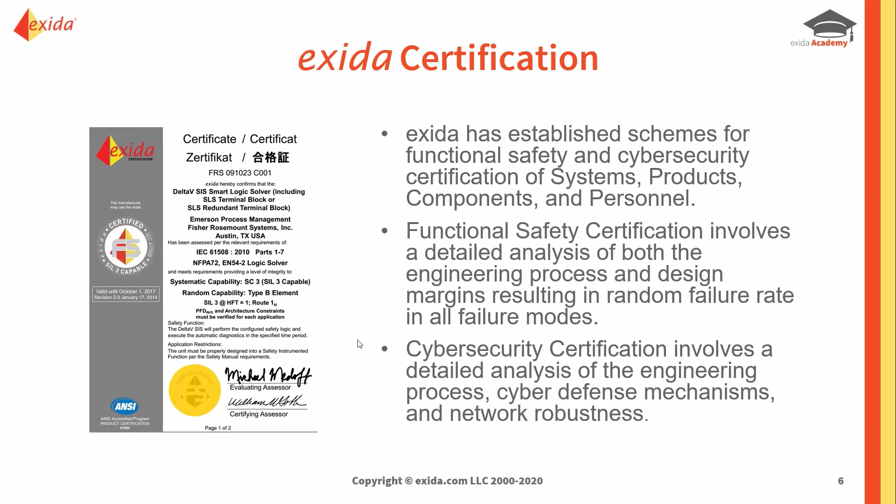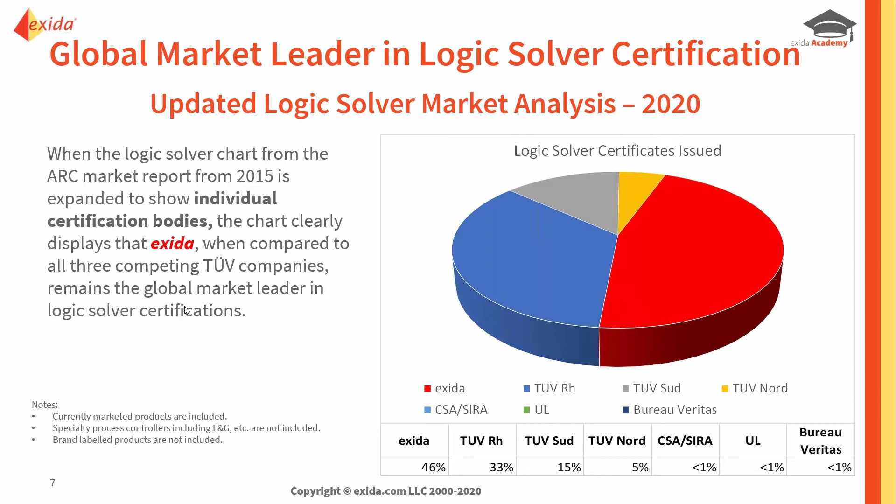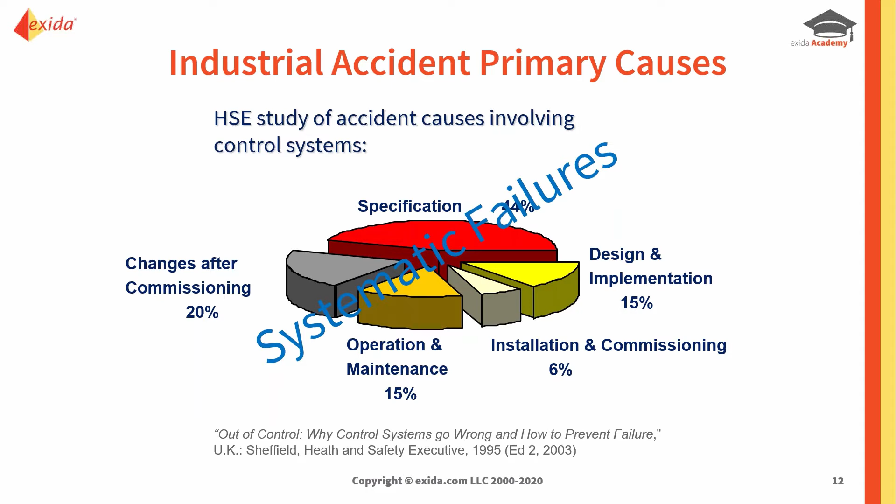When it comes to 1511, 1511 is built around a life cycle. And again, companies that come under the OSHA PSM requirement in the US, in other words, if you have 10,000 pounds or more of anything that's highly toxic, corrosive, it's an asphyxiant or it's explosive, then you have to follow the OSHA requirements for PSM. In the UK, it's COMAH.

And 1511 and the old ISA 84, which is now ISA 61511, is recognized as being what we call RAGAGEP. So both COMAH and OSHA require companies that come under their auspices that they follow RAGAGEP, recognized and generally accepted good engineering practice. Some people say best practice, but RAGAGEP is what we usually mean.

So 1511 is built around a safety life cycle that has the 3 phases I mentioned already. We have an analysis phase, design and implementation, and operation and maintenance. And the whole point of the safety life cycle is to help us balance the risk against the reward, and that is making sure that we have a design that's been built upon sound principles. So we've done our risk assessment, we know what our tolerable risk is, and we're designed to meet that and to achieve optimal performance and cost.

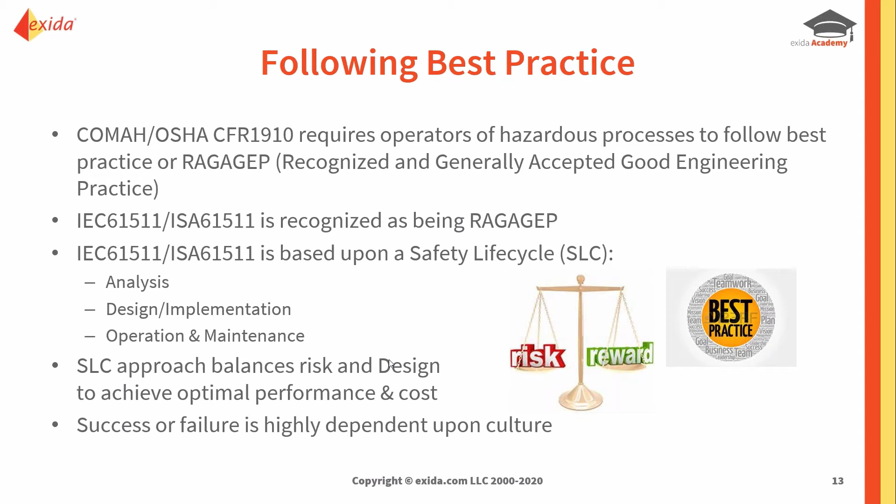Now, one of the other things that is also a potential issue is the overall corporate culture. And corporate culture can play its role in the systematic, because if it's squeezing operations so that they have to cut costs, they have to cut manpower, they can't spend the amount of time they need to be able to do maintenance properly. If all of this has been driven by a bottom line focus, then it's going to be very difficult to implement this successfully or even implement it to meet the risk requirements.

So the objective, of course, is to try and eliminate as far as possible any systematic faults, being those 3 Ps. And then, of course, we want to be able to design to make sure that we have reduced the potential for random faults. So we have a very dependable design.

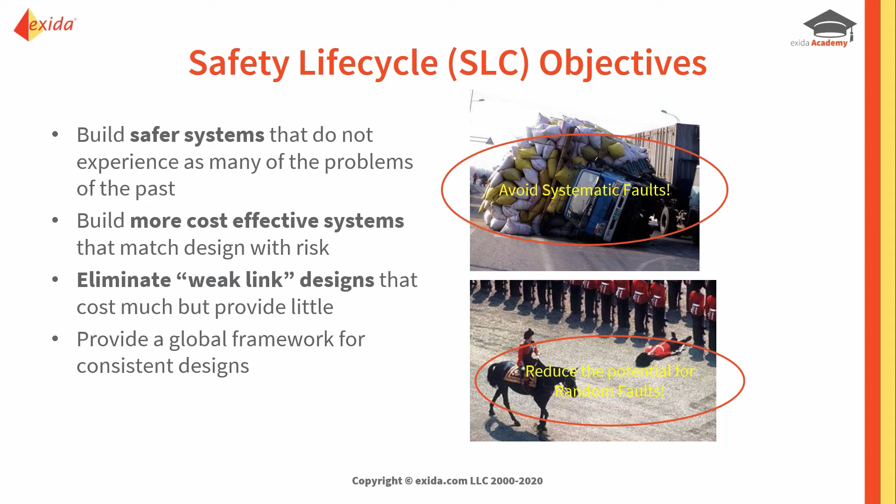And when we look at the life cycle, what happens is when we finish the end of the analysis phase, we've identified the hazards, we've identified the consequences and the likelihoods. We've done our layer of protection analysis, so we know how much risk reduction we need to achieve beyond what we already had. So that would then determine whether we have any safety instrumented functions and what the SIL targets are for those safety instrumented functions. And we capture all of that in what we call an initial SRS, a safety requirement specification, sometimes called the process SRS. And that's what we use to feed into the design phase.

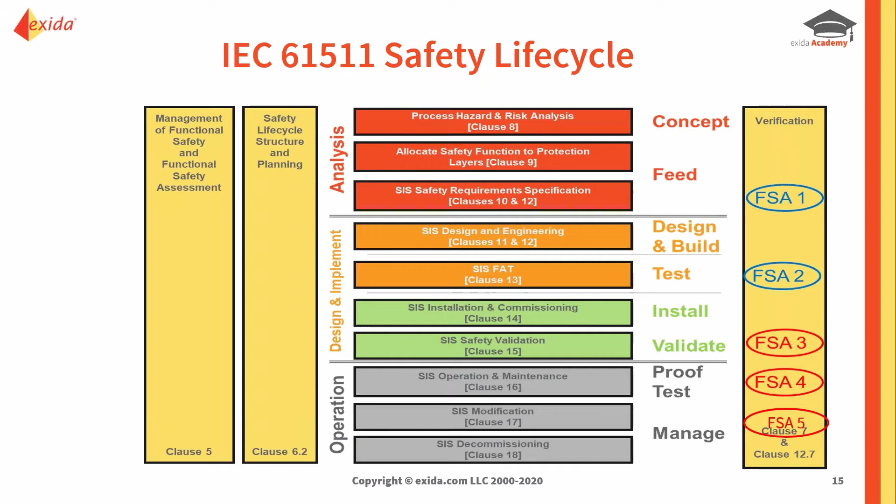So when we look at the design phase, one of the first things we have to do is think about the technology we're going to select for our safety instrumented functions. And of course, what we have to do, according to the requirements of 1511, is justify that selection. And the justification is very important because we need to make sure that the systematic capability for the SIL, as well as the application and reliability requirements, are met.

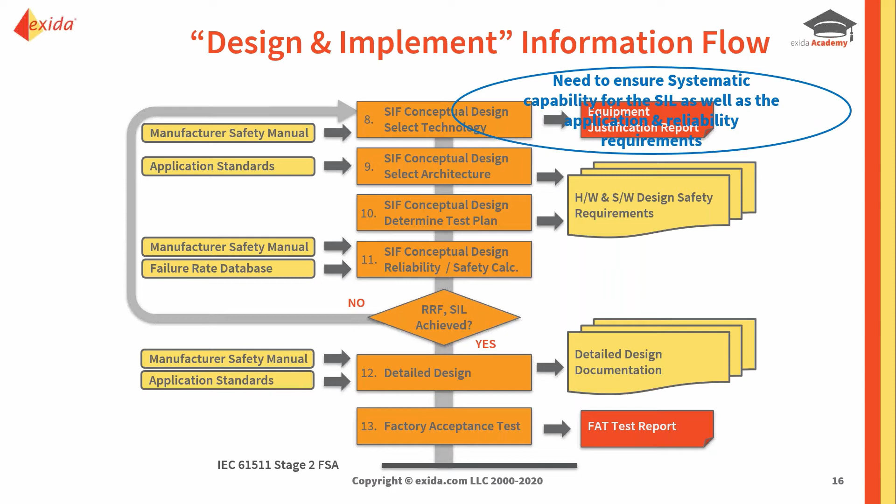So we should be selecting the equipment that we need to perform the task. So that means it's either going to be selected on the basis of IEC 61508 certified products or what's known as prior use justification.

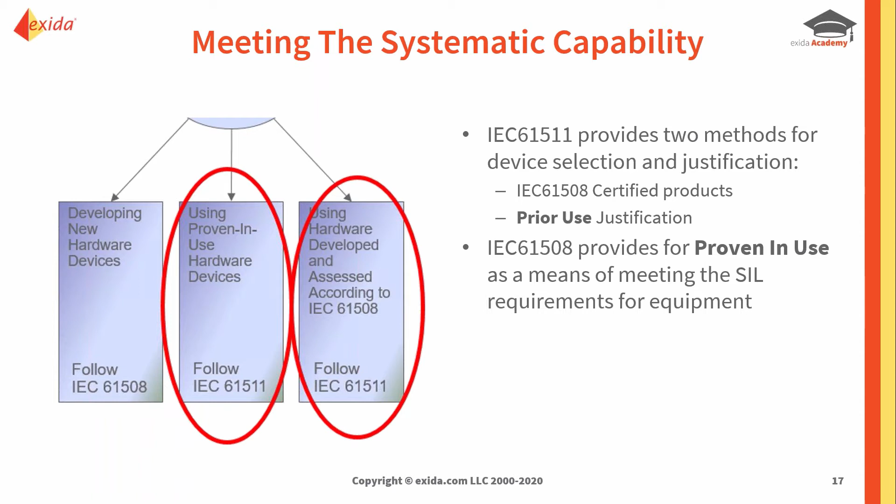Now, for example, IEC 61508 talks about proven in use, and some people mix them up. They mix up proven in use with prior use justifications. So what's the difference between the two? Now, I didn't put this slide in this morning, and I just explained it, but after some of the questions I got, I figured I should put this in the slide.

So proven in use is based on the manufacturer's design basis. In other words, what the temperature rating was, the vibration limit, the corrosion limit, and any desired maintenance support for the device. That's from the manufacturer's perspective. But for prior use, this now has to deal with the installed performance within a process application, which will be for a given or a specific operating environment, which is very often different than the manufacturer's design basis.

So this is the difference between the two, and this is defined and called out in 61511 under clause 3.2.51. So again, I didn't have that in this morning, but I thought I would put it in for this afternoon so that people will see the difference and understand the difference between the two.

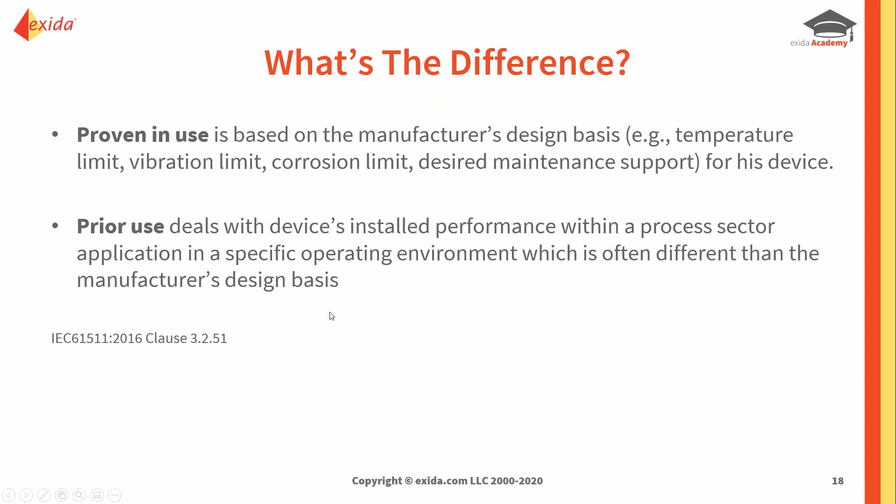So the other thing we have to remember is for equipment justification, we also have to consider the application requirements. So are we using this device in a way that we should be using it? And secondly is the safety integrity requirements. What's the SIL that we require? So both of these need to be met and not just the systematic capability.

Now, of course, when you use an IEC 61508 certified device, there is a certificate that states what the systematic capability of the device is. And if it has a systematic capability of SIL 3, then you can use that in a SIL 1, a SIL 2, or a SIL 3 application.

But the thing to remember about the certificate is that, number one, is it coming from a credible source? And if it's a third party, is that third party accredited to do that work? What you should look for on the certificate is an accreditation body logo. If you look on an exida certificate at the bottom left-hand corner, you'll see a blue and white ANSI logo. So basically, ANSI is the accreditation body for North America, and we are accredited by ANSI to be able to carry out certification.

So if we do this, we have to document the justification. From a 61508 point of view, it's easy because we can use the certificate as part of the documentation and the justification. But for a prior use justification, that's a different story. So the first thing we need to look at is, does it perform all the needed functions that we require? And that's the same in both cases. Is it rated for the expected environment?

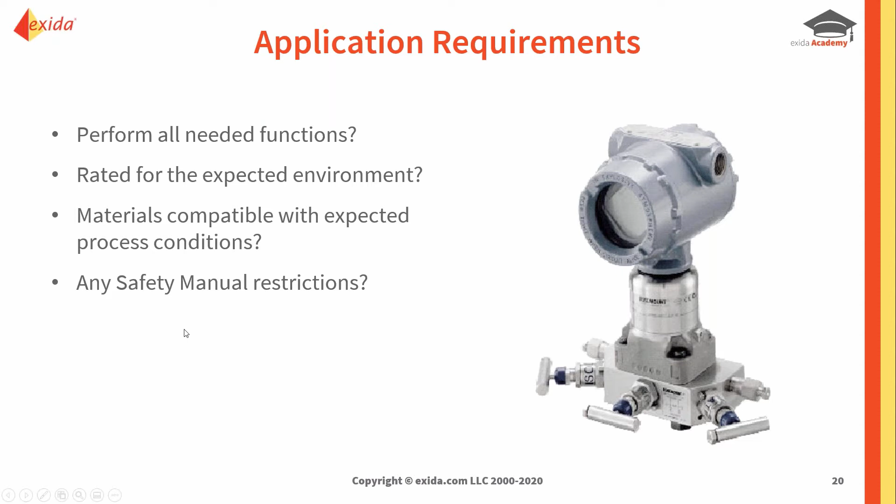When it comes to the prior use justification, we need to make sure we've covered our bases and we've got everything we need. So some of the general requirements: demonstrating the SIL capability of the device based on previous operating experience in similar operating environments. So here again, it has to be similar.

And the other thing is, of course, that we're trying to gather from a prior use justification evidence that dangerous systematic faults have been reduced to a sufficiently low level. So what this requires is, if it's coming from the end user, then the end user has to have a good data gathering system in place that meets one of the standards identified in 61508. So for example, the IEC 60300 for gathering field data, because we have to make sure that the data is accurately gathered, that we've properly classified failures.

Because what happens in reality is a lot of failures in the field often get classified as systematic and not as random. And when we come to do the PFD average calculations, we're looking at the random failures to include in that. So if we haven't documented our failures properly, we're going to have potentially unrealistic and optimistically low random field failures. And this does happen.

And so the general rule of thumb, again, is all failures should be treated as random until proven otherwise. And that way you don't lose any of the random failures. It may be that some of the failures turn out to have some systematic issue later on, but initially you're recording them as random. So we need to satisfy that random hardware failure rate.

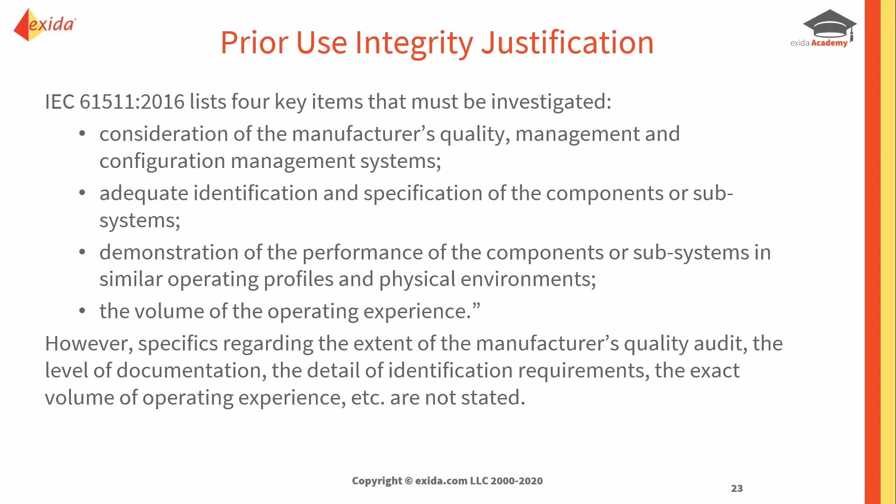So what does this mean in practice? Well, it means that whether it's the manufacturer or the end user, there should be good, accurate, and properly maintained records. If the end user is using a tool for tracking and it complies with, for example, the IEC 60300, then that's a good, accurate way of maintaining records.

But again, you've still got to classify the failures properly. The operating environment and application must be similar and justifiable. So for field devices especially, the behavior of the device in the operating environment can be the same between safety and non-safety. So if you're using them in non-safety, provided you can show the operating environment and application as being the same, then you can count those devices and the hours that they've been operating for.

The important thing is that we have to make sure that any failures have been properly investigated, because what we're trying to prevent is systematic failures that could cause dangerous failures. And that's why no dangerous failures should have been experienced in the last year of operation. So in theory, if the manufacturer's device has been well designed and manufactured, even though it's not certified, then a year of operation without a dangerous failure should be feasible. If it's not, then it's certainly not a device you want to use.

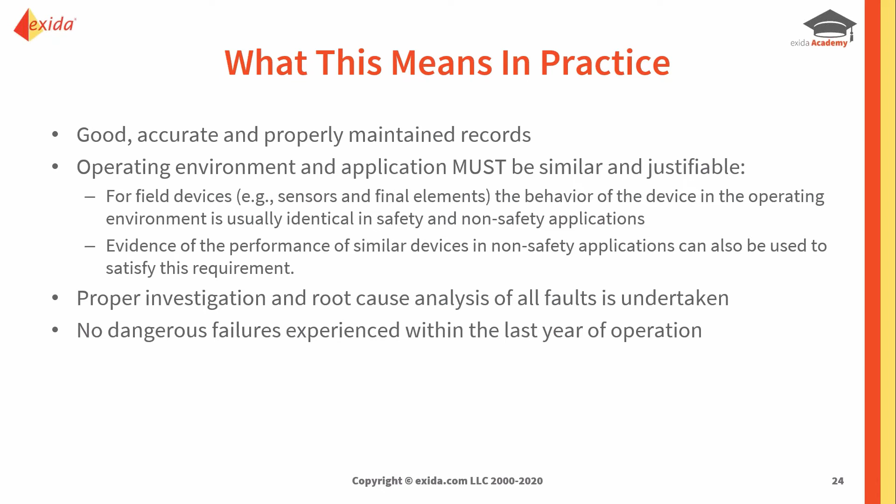From a device usage and performance point of view, the list of field devices can be used to support claims of experience in operation provided, and here we go again, the list is updated and monitored regularly. So again, we have to make sure we've got proper management of change and proper documentation in place. Field devices are only added when sufficient operating experience has been obtained. So again, the word sufficient doesn't necessarily give you a clear indication.

Field devices are removed when they show a history of not performing in a satisfactory manner. So again, what does satisfactory manner mean? And the operating environment is included in the list where relevant. So this is important to understand, especially from the performance point of view. And we know that device performance can be highly affected by the operating environment.

So again, for selection of devices, the standard talks about adequate performance of a sufficient number of installed devices in multiple installations for a sufficient operating time. So there's all these nice woolly words there: adequate, sufficient, multiple. What does it mean? And then longer operation can help reveal early failures, such as those related to specification. So obviously, the longer the device has been in operation, the more likely any systematic issues will reveal themselves.

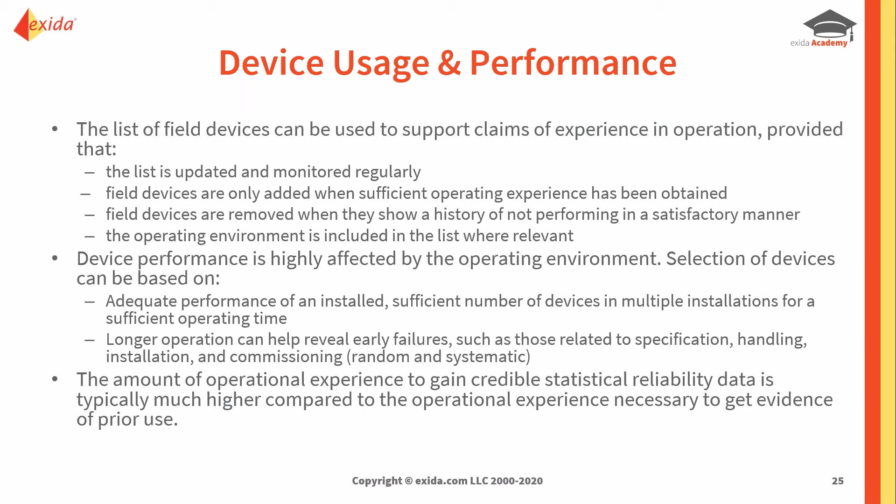Again, we don't specify the amount of operational experience to gain credible statistical reliability. And we know that for statistical credibility, we need a large enough sample, and it has to be similar enough in terms of the operating profile and application. So here, what we try and do is give some guidance on this. 61511 has no defined time in use requirement.

So what we recommend is the equipment item must have been shipping for at least 1 year without any revisions or changes, or the equipment must be shipping for 2 years without any significant revisions or changes. So as I said, if it's a minor change, that's fine. But if it's a major change in the application or change in the firmware or change in the hardware design, depending on what it is, it may invalidate the prior use justification.

From the point of view of operating experience, what we recommend is at least 30 million hours of estimated usage from a minimum of 10 different applications with the same stress conditions equal to or above the average conditions of the application. So this is what we've considered to be a very reasonable and very good way of specifying that. Because if you've got a very common component that's used in multiple places in the same application, then you could fairly quickly get to those hours.

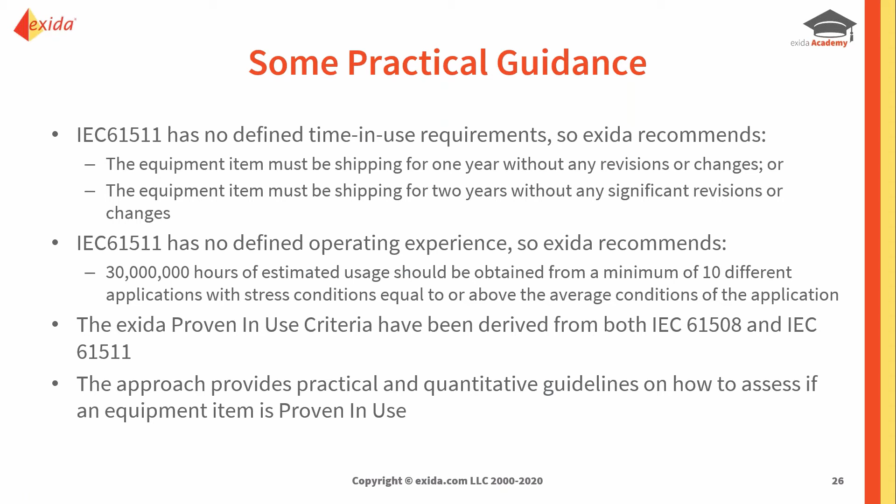So we've really derived this from looking at both the 1508 and 1511 requirements. And what we're trying to do is help by providing a practical and quantitative guideline on how to assess this equipment for proven in use application or prior use justification.

So when estimating the number of hours in use, one of the other problems that we find is the equipment item's actual installation dates as opposed to when it's shipped. Sometimes when we look at manufacturers' field returns, the assumption is as soon as it leaves the factory, it's in use. When of course we know from practical experience that the device may go on the shelf somewhere as a spare, or if it's included in a system, it will go into storage before the system is ready for installation. And that could be 6, 12, or 18 months.

And here again, if the actual installation dates are not available for the hours in use estimation, then you could assume that at least 6 months has occurred, and therefore installation was 6 months after shipment.

That's not a bad approach. Here again, the other thing is, this morning somebody actually asked me, they said, we have devices that have been running for 20 years without failing. They have a 5-year useful life. Can we do a prior use justification? No, you can't. Because again, once you get outside of useful life, all bets are off.

And that's because of one simple fact that everything is based on when we do probabilistic analysis and PFD calculations, and that is the assumption of constant failure rate during useful life. So the bathtub curve, the flat portion of the bathtub curve, we take an average, which is slightly pessimistic, not a bad thing, between where the end of the infant mortality occurs and where the beginning of the wear out occurs. And because of that, in that flat portion, we can approximate by saying that the mean time to fail is going to be equal to 1 over the failure rate, lambda.

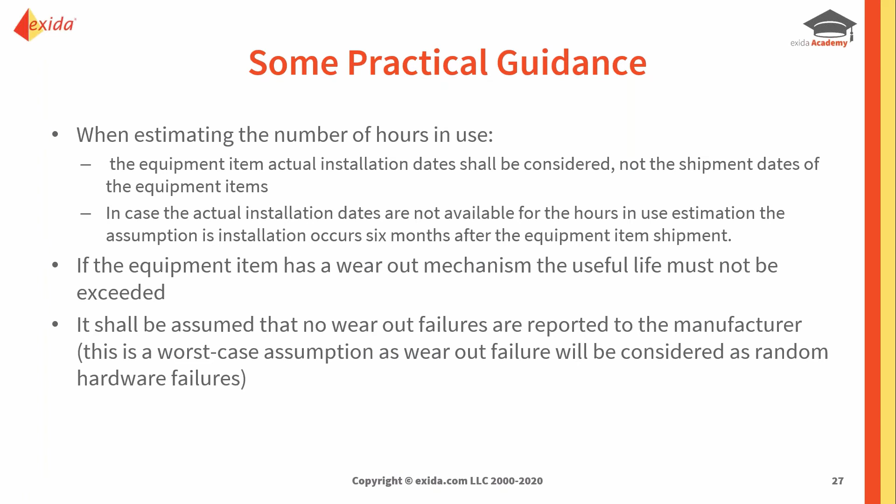Okay, so let's sort of summarize this. Studies have shown that the majority of accidents have been traced back to systematic issues. And as I said, typically the systematic will come about because there's an error in the design specification, or wrong component, or anything caused by the fact that somebody wasn't properly trained or they weren't following a proper procedure. So this is why when we don't use certified devices, we have to do a prior use justification for the equipment we're selecting, because we have to make sure that not just the random failures from the PFD or PFH are met, but also the systematic.

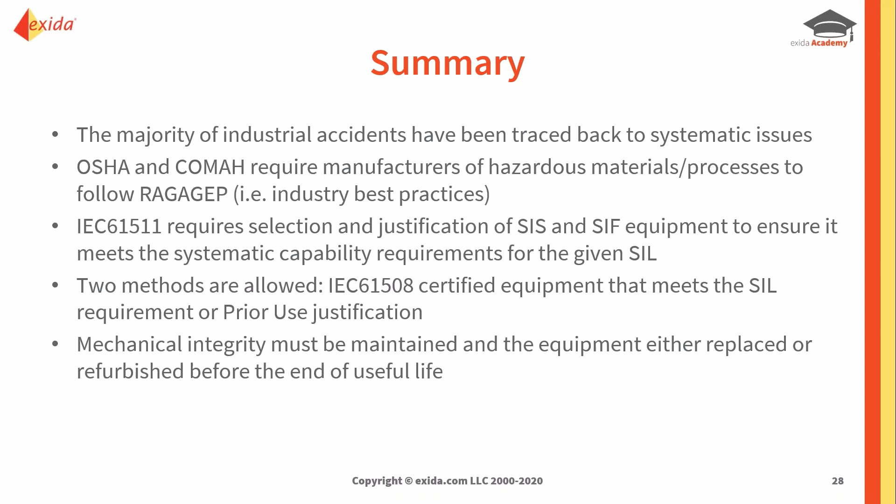And OSHA and COMAH require manufacturers of hazardous materials to follow RAGAGEP, as we said, recognized and generally accepted good engineering practice. 61511 requires us to justify our selection of SIS and SIF equipment to ensure it meets the systematic capability, and it defines the 61508 certified approach or the prior use justification. And mechanical integrity must be maintained and the equipment either replaced or refurbished before the end of useful life. This is very important.

Prior use justification requires sufficient volume of operating experience in terms of hours for the equipment operating in similar application environment. And as we've said, our recommendation is for at least 30 million hours and 10 different types of similar application. Prior use requires tracking of the versions to ensure the prior use is based upon the same version of equipment. And that also applies to any embedded software, not just the hardware. And we do need to make assumptions regarding the in-service operational time for the equipment.

Now, interestingly, some manufacturers now are including power on hours counters. So once the thing is fired up in the field, the counter starts counting the number of hours of operation until it fails, and then it stops counting. And provided the failure isn't catastrophic where you can't read the counter, then you can look and see, okay, it ran for 10,000 hours, it ran for 100,000 hours, or however many hours it ran for before it failed. The key obviously is that the operating profile must be similar in terms of application and environment, and it can either be safety or non-safety for prior use justification, as long as the application is similar.